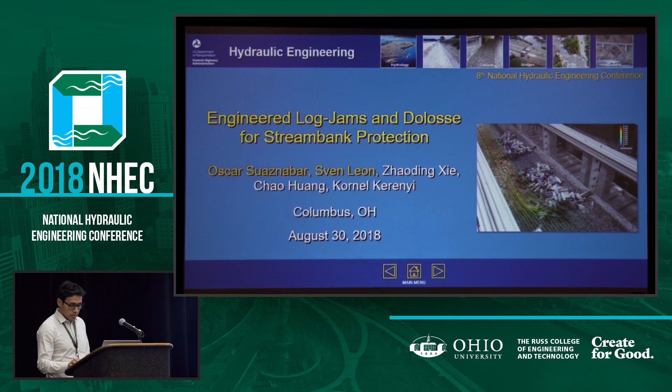In this presentation, I'll mainly talk about the physical and numerical modeling approaches of the FHWA hydraulics laboratory research to investigate mainly two things. The first one was to investigate the stability of these structures during floods. And the second one was to advance and try to refine the design of engineered log jams that will be used in stream bank stabilization projects.

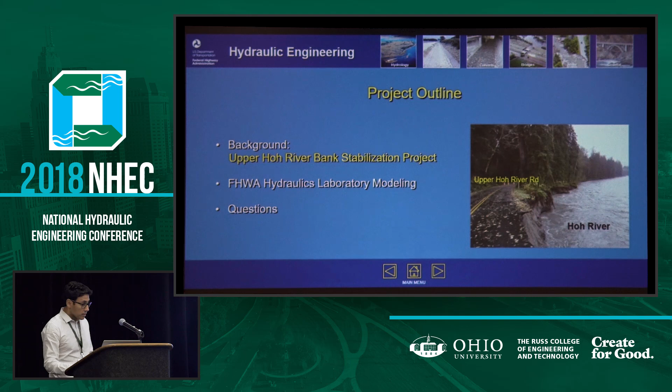But let's start first with a very brief introduction into the background of the project. So this is the Upper Hoh River, and parallel to that river, there is the Upper Hoh River Road. The Hoh River is in Washington State, as I said before, on the Olympic Peninsula and west slope of the Olympic Mountains in Jefferson County.

This is actually a fairly big project. So we have 3,200 feet of bank stabilization. The task group decided not to use riprap. They don't want to see any riprap in there. And instead, they wanted to create habitat complexity and natural wood between the road and the river channel. And that's the reason why I decided to use this approach of engineering log jams.

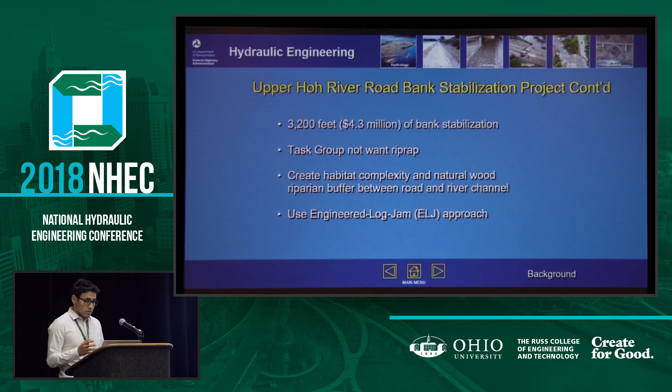And these two pictures basically are showing the problem. This is the Hoh River at two different sections of the river, and the red line that you see in the two pictures is actually the roadway. And you can see that both are located at the outside banks of meander bends of the Hoh River, and that channel migration has reached almost all the way to the valley limits to the north. Basically, this is the main problem.

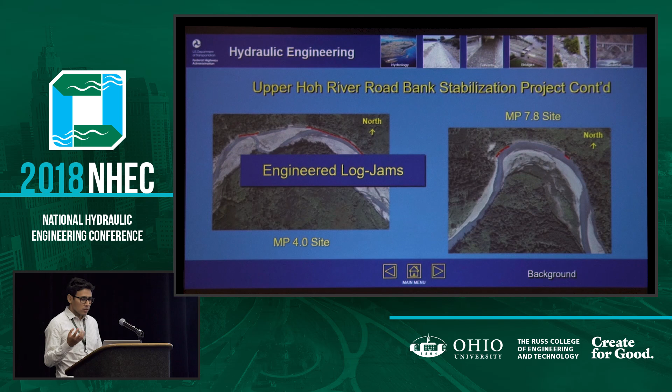And we are trying to solve it, or the Western Federal Lands wants to use the engineered log jams, but these are not conventional log jams. They are using Dolosse this time.

This is a photo on the left that gives you a good idea of the size of what's called a deflector log Dolosse bundle, which is basically a 16,000-pound concrete Dolosse that is attached to three 20-foot long logs. And these logs have a diameter in a range between 18 to 36 inches.

At this point, I would like to acknowledge the Washington State DOT who came up with this idea of using Dolosse and logs as the main elements or the main components for designing engineered log jams. They started this project, I think, for the Skagit River that was also located in Washington State.

And on the right-hand side, you see basically, as many of you know, the hydraulics lab in McLean, Virginia, has an industrial 3D printer for plastic materials that works 24/7. And we decided to fabricate the Dolosse by ourselves.

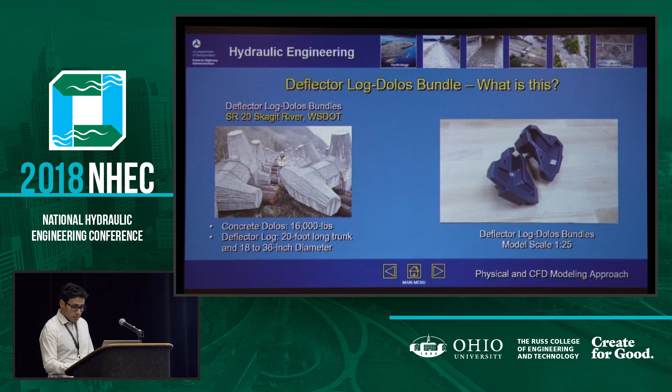So basically what we did, we 3D printed molds, plastic molds, to cast about 200 concrete Dolosse. And at the end, we basically just got wood, basically, and tried to keep the same densities that we observed from the field. So basically, we are keeping the same material densities, concrete and wood, which I think this is basically the most important part of the stability of a log jam.

Try to balance the buoyancy forces of the wood with this heavy concrete Dolosse. So the model scale is 1 to 25. It was the best suitable model for us to run the experiments in the flume.

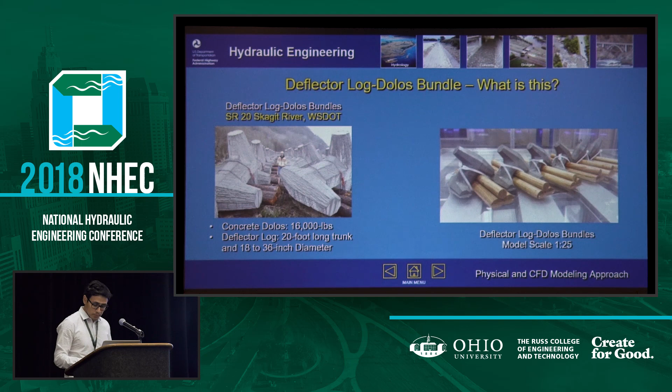And this is the initial design of the engineer log jam that was provided by the Western Federal Lands. You will see that the main components are these that we called before in the previous slide, these log Dolosse bundles, and with additional root wads and key Dolosse as well.

The key Dolosse are single Dolosse placed along the side face of the engineer log jam. So basically, the flow is coming from right to left. This is the length of the log jam, 80 feet by a width of 20 feet.

And what you're looking at here is the first layer. This is basically the base layer that sits on the stream bed, and the channel bank toe is this line here. This is a side view. You can see here the channel bank slope and the stream bed. So it's basically the layout of the first layer.

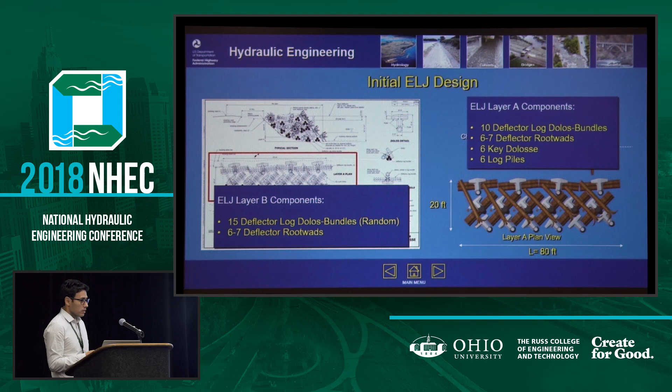These are the components of the first layer. And for the second layer, it was not so clear. It's pretty much a random installation. And also keep in mind, they are just interlocked. They are just frictionally connected, basically. It's a combination of these Dolosse with some root wads.

So this would be the total of elements for the channel bank stabilization project at the Hoh River. We are talking about 31 log jams with a total of 2,300 logs, 775 Dolosse, and 450 root wads, based on the initial design.

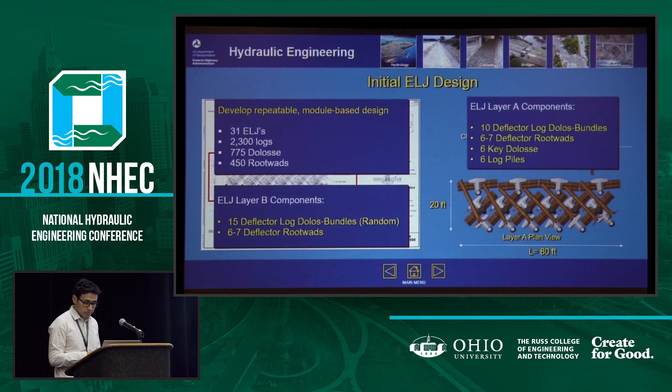And for the flow conditions, in order to run our experiments in the flume, it was very important to consider the Froude similarity. Usually that's the one that we use when we are dealing with free water surface flow.

Western Federal Lands was going to provide the Hoh River gradation analysis, like 9 samples, and they also provided the design requirements. So it's a 50-year flood. The 50-year velocity ranges between 12 and 14 feet per second, and the 50-year depth, the design depth, is 15 feet.

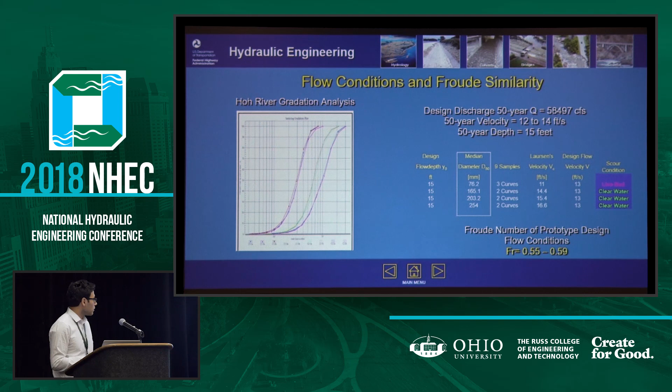You see here on the box, this is the D50 from the Hoh River bed. You see there's pretty much a coarse bed material, so between gravel bed and even pebbles. We ran a very quick analysis using Laursen's critical velocity equation in order to check what kind of scour conditions we are expecting in the river. For most of the cases, we will have clear water scour conditions, and that's why we decided just to run our experiments in the lab for these scour conditions.

These are basically the flow conditions that we use in the flume experiments, and the very important part is that we are always maintaining the same range as in the field. So this is the prototype Froude numbers, and this is the Froude numbers in the lab.

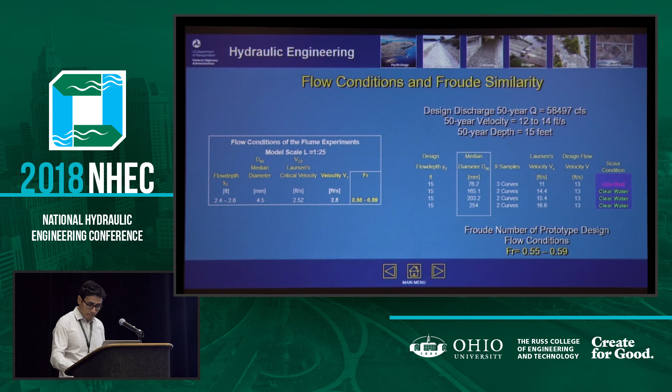Talking more about flow conditions, since this is actually a channel bend and we have a straight flume in the lab, we wanted to test extreme conditions for a straight channel. We decided to use 2 cases: one using the design velocity as a parallel flow, going parallel along the log jams, and the most extreme case, using the design velocity as a perpendicular flow, going straight into the upstream face of the first log jam.

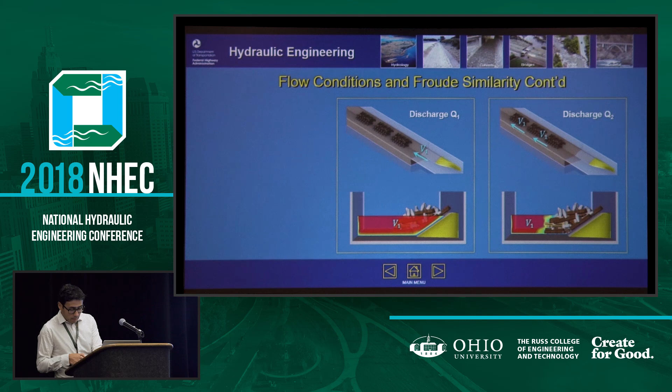You can see here at cross sections how the velocities are computed. We were also able to find some aerial videos on YouTube from the Washington State DOT of the Skagit River project. You see here that even as a channel bend, they have also kind of these 2 cases as well. You can find this type of 2 cases.

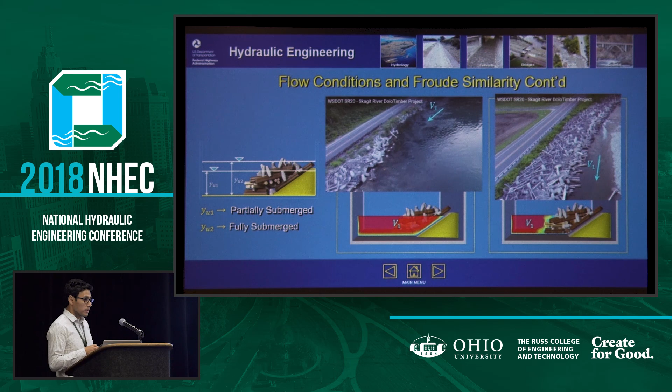In addition to that, although the design of the log jam is for partially submerged conditions, with the requirement to always have a freeboard above the water surface, we also wanted to check what happens when the entire log jam gets fully submerged. This is another case that we wanted to see.

This is basically a kind of summary. The project took over more than a year of running experiments and CFD modeling. The fabrication time alone was maybe like 2 months. At the end, we were able to run only scour experiments, which just focus on scour, how the scour impacts the log jam installations. That's the reason why we ran these experiments on fine sediment.

Once we were confident with the stability of the model against scour conditions, we decided to also run some hydrodynamic loads. We have some load sensors on a single log jam. Based on these two, we decided to replace the fine sediment with coarse sediment because we wanted to have something similar to the case study. The advantage is that we are now combining these two loads, combining hydrodynamic loads with stream stability or stream instability.

And the research goals are basically to validate the design, develop design coefficients, try to optimize the design, and develop design formulas as well.

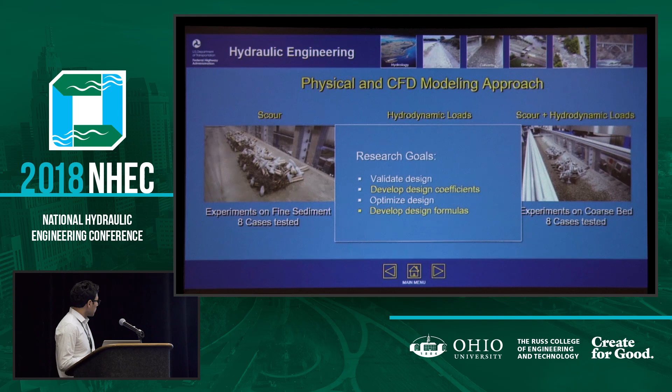This is the experimental procedure for scour and stability tests on erodible bed material. Usually, we always start with a laser scan that actually maps the bathymetry, the channel bank geometry, as well as the initial conditions of the log jam installations in the flume.

Then we just run the experiment. In this case, we have experiments that run for equilibrium scour conditions and experiments to see the failure of the log jams.

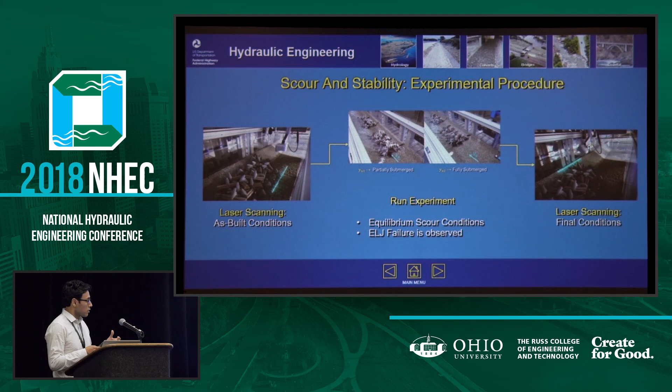We intentionally wanted to see failure of the log jams in order to define what are those failure modes. At the end of the experiment, we do another scanning to run some comparisons before and after. The laser we use has very high precision, so even if the log jam wouldn't fail, based on the laser scanning we will notice that some bundles within the log jam may displace a little bit, or maybe just rotate or turn. That's the advantage of using this system.

For the first case, when the velocity is just parallel to the log jam, the scour hole was just around the key dolosse. But for the second case, the more extreme case, the scour hole was deeper and larger, and that's the reason why we started to see failure of the key dolosse that were just launching into the scour hole.

Based on these observations and some others, we decided that the key dolosse are not providing any stability to the log jam, because while these key dolosse were failing, the log jam overall was stable enough, so nothing really happened.

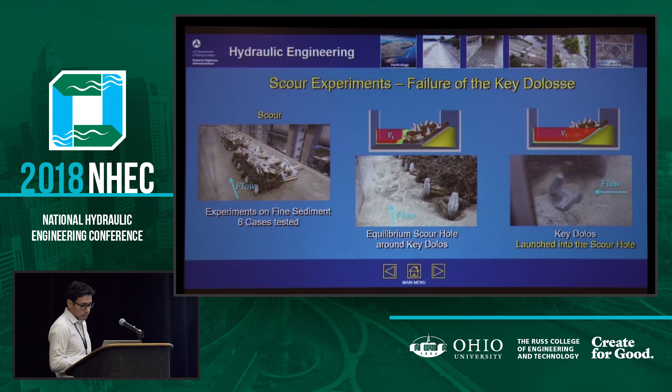This is just showing you one of the laser scannings that we do after the test. For this particular case, we removed the second layer, the top layer, and kept layer A. So these are actually three log jam units, and this is the scour bed form around the log jams.

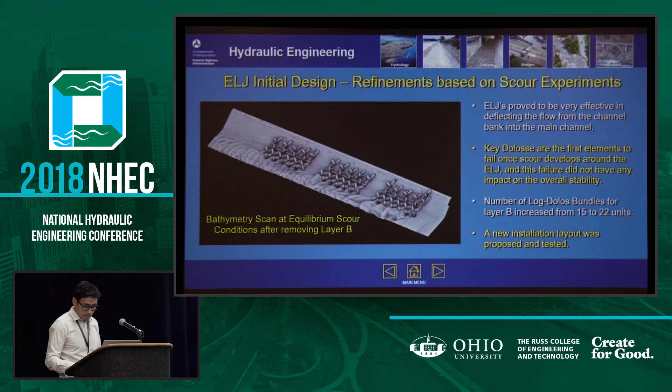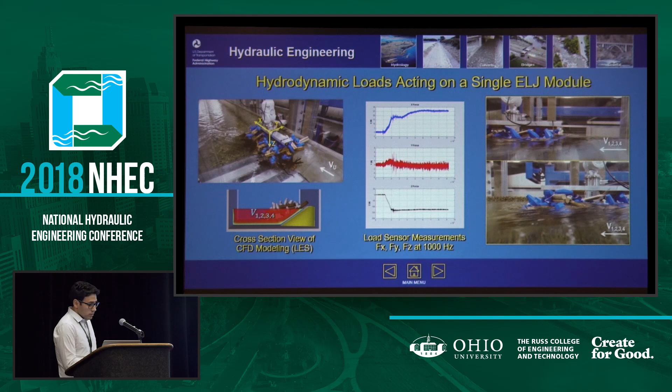For the next step, once we gained some confidence after this new design - not using any key dolosse anymore, and increasing the elements of bundles for the second layer, which was very important - we decided to run force measurements where we measure drag, lift, and transverse forces. At the same time, we ran CFD modeling for the same cases, because we wanted to assign a drag force coefficient to this type of structure.

The table shows a comparison of the results: this is the drag force measurements from the experiments, and this is the drag force results from the CFD model. The CFD model used large eddy simulation because we wanted to capture the complex flow in detail going through the log jam. They compare really well, actually, and we were able to find a stable drag force coefficient from the experiments and the modeling, which was 1.75. This is very important for us in designing stability formulas for the log jam.

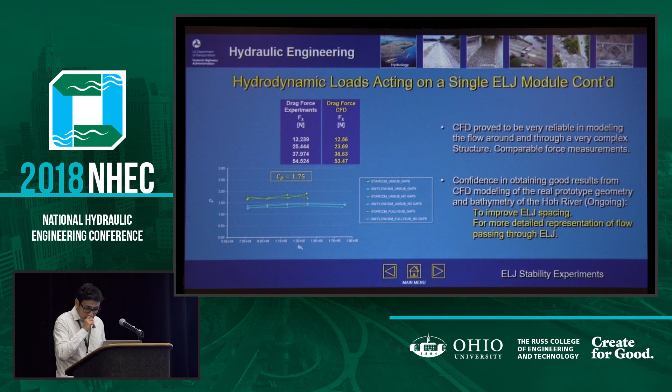Based on stability analysis, we were able to get two formulas. One for a fully submerged case: for a given log jam length, what is the minimum required length that will keep the log jam stable. And for a partially submerged case: what is the minimum inundation ratio we need to make sure the log jam will withstand the flow.

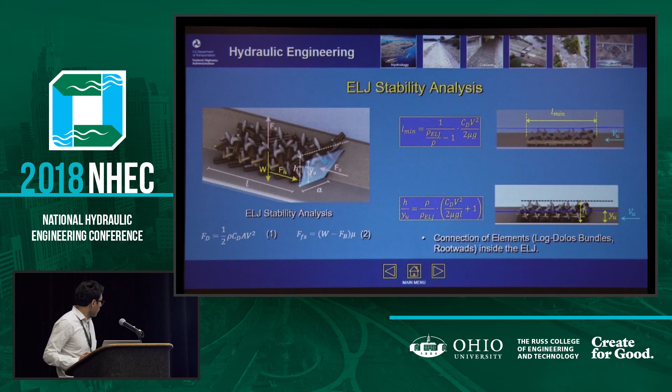Finally, we ran experiments on coarse bed material, where we could combine these two loads - the hydrodynamic loads and the stream bed stability, basically channel bank and stream bed stability. We always look at channel bank stability because the main goal of the log jam is really to protect the channel bank from erosion, as well as the ELJ stability itself. These are the two main goals for these experiments.

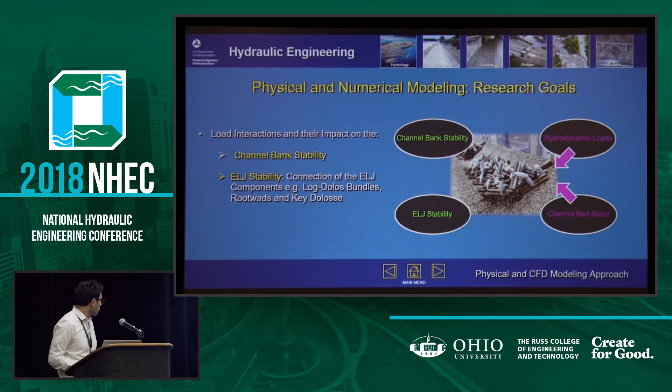You have two images: the one on the left is the partially submerged case, and the one on the right is the fully submerged case. For these two cases, we always use 2 to 3 log jams with a spacing that was also provided by the Western Federal Lands, because they wanted to have - you can ask questions later to Sven, who is in charge of this project, about why he considers it more beneficial to have spacing between the log jams instead of just a buffer of log jams installed on the shoreline.

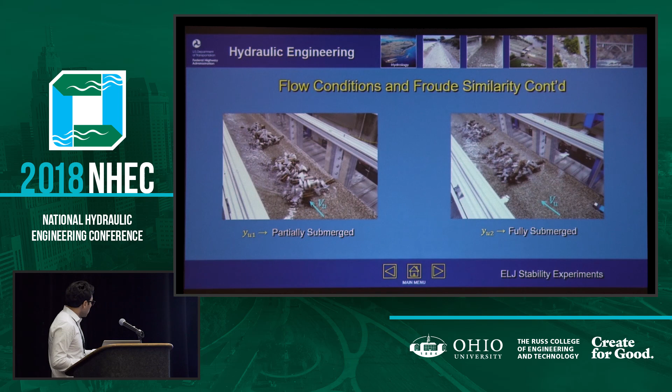Okay, for a partially and fully submerged case, when we have velocities parallel to the log jams, we observe that the log jams are very stable. You see just a little bit, this is like an as-built installation, and this is after the scour conditions. We were always able to observe that the channel bank didn't erode at all. You sometimes see some scour on coarse bed material, though it was much lesser than the experiments on fine sediment, but the log jams themselves were always stable.

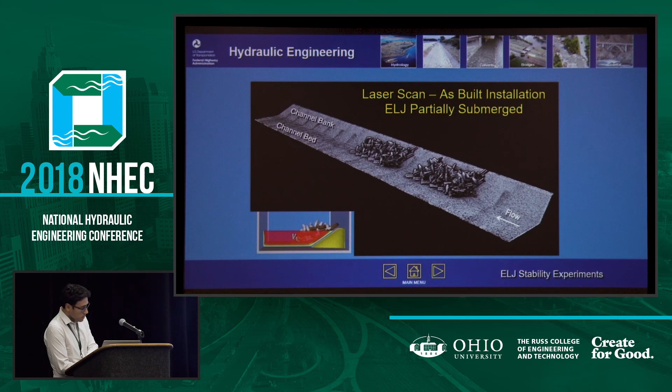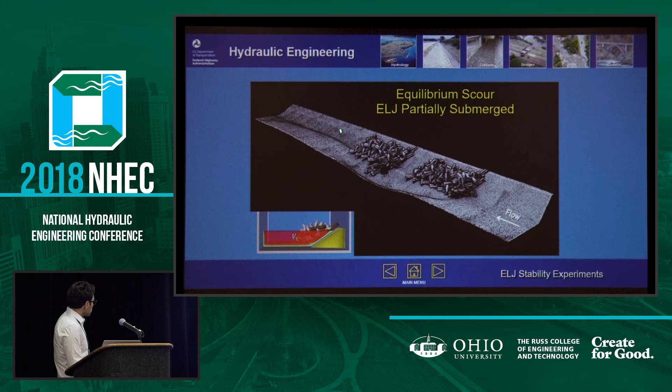For the case of a partially submerged log jam, but this time the design velocity was upstream, we also observed that after just some scour hole, which increased a lot, and some key Dolosse again failing, launching into the scour hole, the log jam itself and the channel bank stability were well maintained. So it was really stable.

And for the fully submerged case, which was the most interesting part of this project, first we wanted to see failure at some point of the log jam. It was similar to sizing the riprap. If you want to develop a formula for sizing the riprap, you need to find these threshold conditions. We wanted to do the same thing for the log jams in order to find these weak locations. Where do you see the first failure?

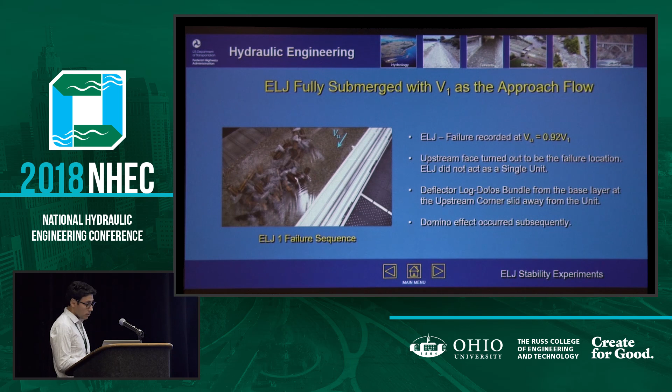I have a recording, which is just like still images. You can see here how the log jam fails. The velocity recorded at this time was 0.92, the design velocity upstream, which was very close based on the stability models that we developed. But of course we wanted to try to maybe increase the stability upstream because it was always consistently failing in the upstream face.

So this interlocking was not really going all the way down. So the length was not giving—increasing the length was not really so beneficial to the failure upstream.

So we tried many things, like in this case, we just fill the first layer with riprap. In the second case, we partially buried the first layer as well. And we also tried to use the key Dolosse that were not necessary anymore along the log jam, just to use the key Dolosse on the front face of the log jam.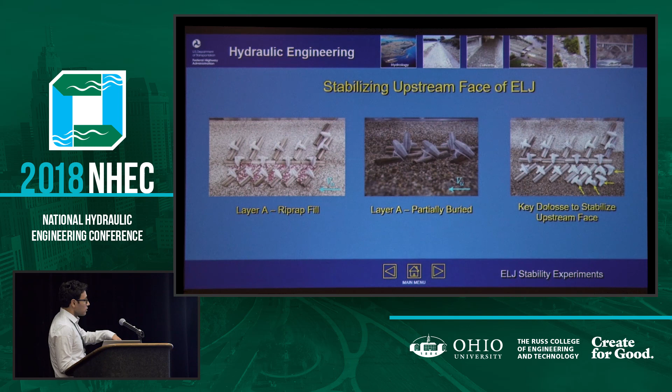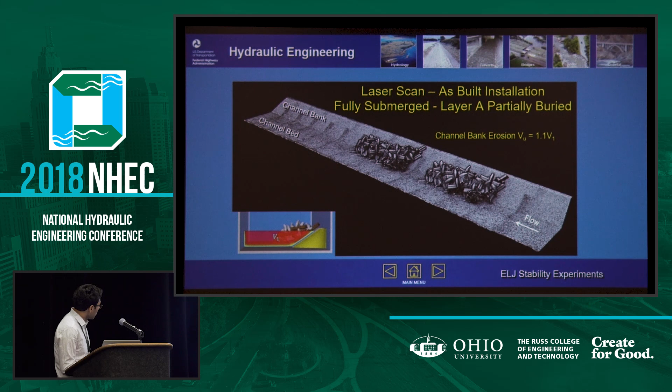And this is the case where we use the partially buried first layer. You can see that after the experiments, we reached almost 10% above the design velocity, and the log jams were stable enough. But the problem that we observed was that the channel bank was not stable.

So from some videos and from velocity measurements, we noticed that once the log jam gets fully submerged, there are some highly turbulent structures above and in between the log jam and the channel bank that creates this erosion here on the channel bank.

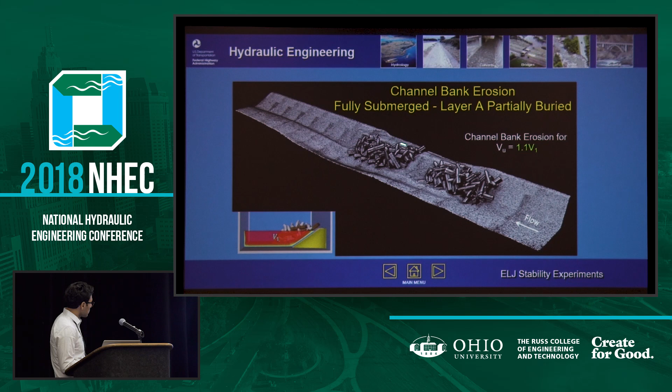And finally, I have a summary of the observations and measurements from the experiments. Basically, the first one is that for the fully submerged case, these high velocities and turbulent structures above and around the log jam cause the channel bank to erode.

For the fully submerged conditions and design velocity in the approach flow, the log jam showed not to protect the channel really well, and it's because of the first point. For the other cases, the log jams demonstrated good stability, and the connection seems to be very reliable.

So for design conditions, we always need to try to maintain these densities or this number of bundles for layer A and also for the top layer. And the key Dolosse installed at the upstream, which I don't have the results here, this was the third case—they also work very well in maintaining the upstream face really stable against these high velocities. And that's what I have, yeah.

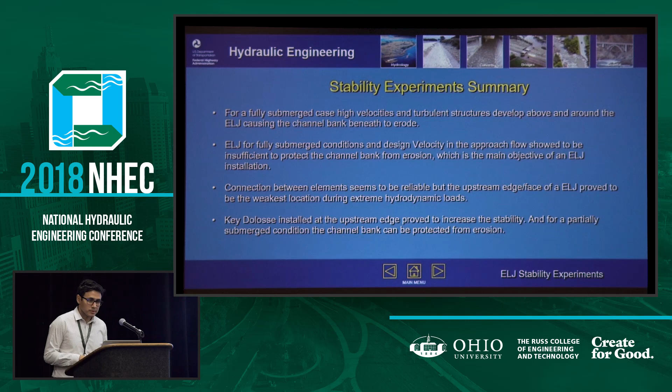The moisture turned out to be important, you're right, because the first experiments that we did when we had only dry wood, the dolosse or the bundles were not so stable. Once they were basically saturated, fully saturated with water, they became more stable. But you always need to look for these low flow seasons and high flow seasons, how this is going to play around. Yeah, it's a good point to consider.